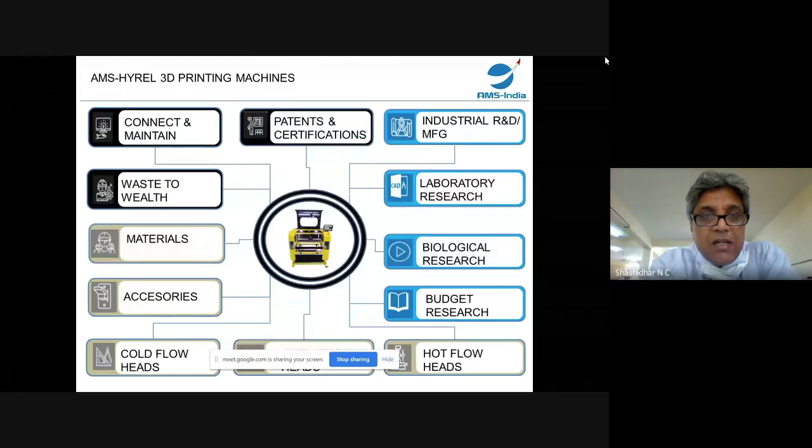I will talk about the accessories of the machine, which will give an insight on how versatile a machine can be. I will also give a little information on a topic called waste to wealth, which may be very useful for students and the community given the current times. I will also talk about materials which can be printed or used in additive manufacturing, and give information on the connectivity of this machine, which will really help for research purposes.

Our factory is in Peenya, about 2,500 square feet, and we make 4 machines. We classify our machines into 4 brands: industrial research machine, laboratory research, biological research, and budget research. There are 4 categories of machines that we make. I will go through each in more depth and tell you specifically what these machines are and why we have categorized them like that.

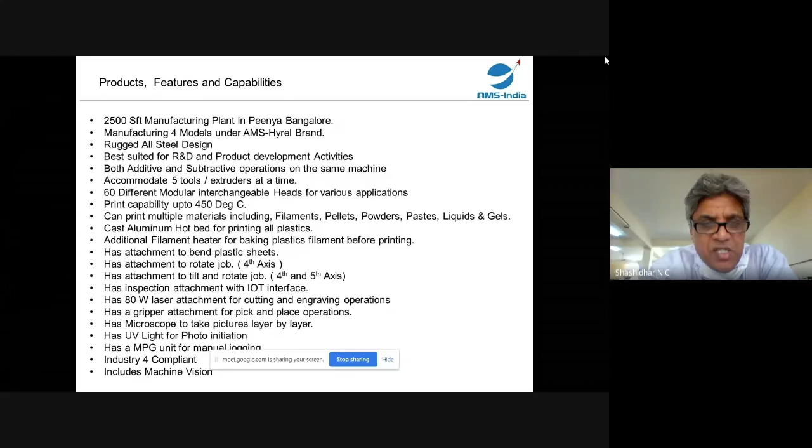But fundamentally, the gist of what our machines can do, as a snapshot, I am giving it to you in this slide. The machines are all steel. One of the most important things we have done is that our machine can be both subtractive and additive in nature, meaning you can do additive manufacturing and also subtractive operations like machining, or remove material and other things. It can accommodate 5 tools at a time, meaning 5 different materials can be processed. This is a feature with which we'll be able to mix and match different materials, thereby making composites, or it can be used for biological purposes for mixing different gels or liquids together.

The machine is flexible enough. What we have done is develop different modular heads which are interchangeable and can be used across any machine. Across the platforms, these modular heads are common. So one can have a head for civil engineering purposes, and tomorrow another head can be attached for the electronics department, and the day after tomorrow something else for mechanical. So a lot of people can use the machine at the same time, only the heads are going to be different.

A machine has the capability to print up to 450 degrees centigrade, which is the temperature to which our extruders can go. So anything that can melt within 450 degrees centigrade can be printed on our machine. Different types of materials including filaments, pellets, powders, pastes, gels, etc. can be printed. We have a hot aluminum bed on which we can print. Apart from that, there are many more accessories which I will show you in more detail in the coming slides.

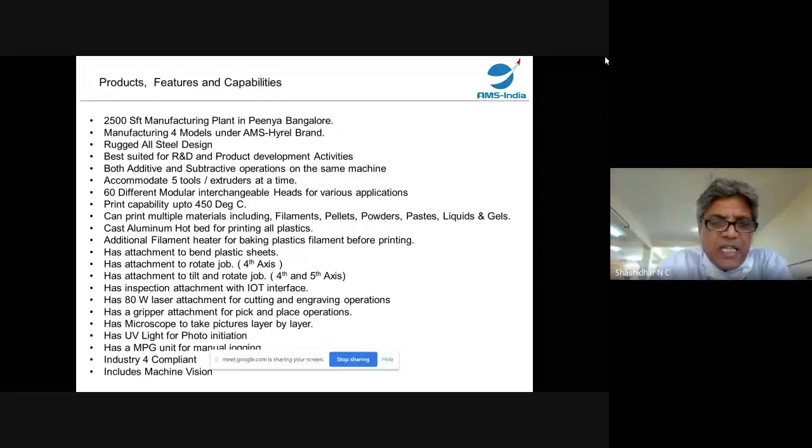Across the globe, we have supplied this to more than 35 countries. More than 650 machines have been supplied, including to NASA and many other institutions across the globe.

Quickly, I just want to go through one small topic from which we started this whole activity, something called Precious Plastics. A couple of years back, there was an organization called Precious Plastics from the Netherlands. They wanted to save plastic wastage and reuse it, recycle it, and create something by which people can use this wasted plastic and make something useful out of it. So we created a concept called waste to wealth.

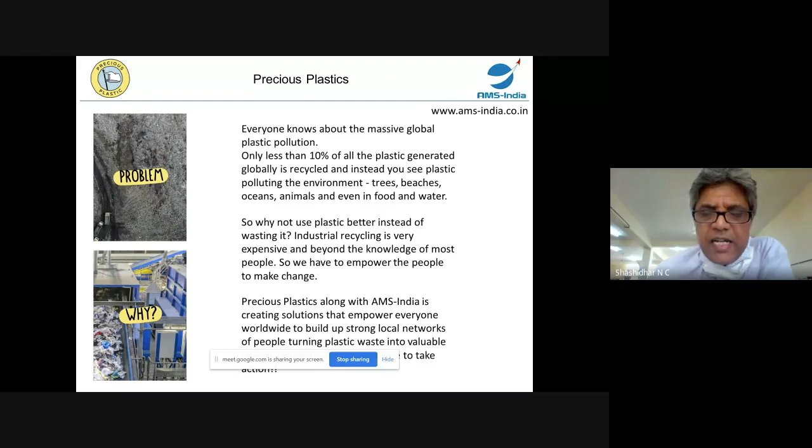Then we created machines under the same category of waste to wealth, given as kits, given as technology, at a very low cost for students, for people who want a job, who do not have jobs, who want to do something as a startup, who want to do some project of their own, who want to make some money. As a community, people are having these machines nowadays to utilize ways by which plastic can be processed.

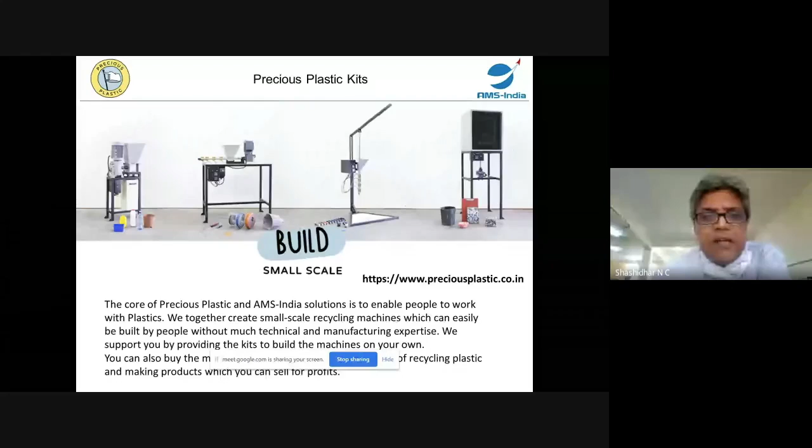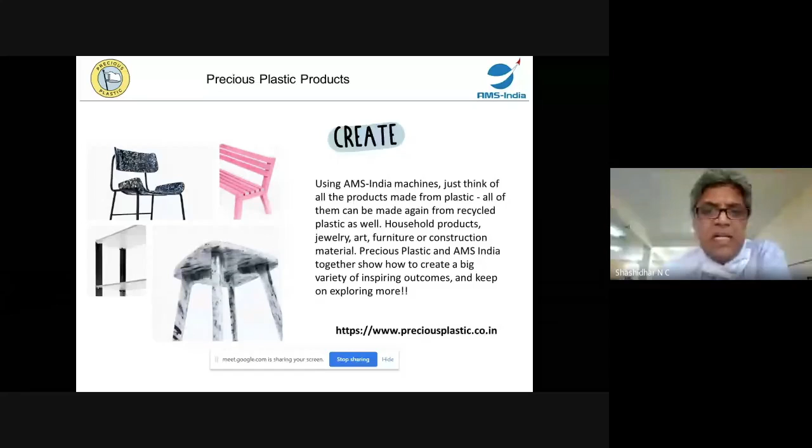And we also make higher types of machines which are semi-industrial in nature, wherein we can create different types of parts made in plastic. Basically, these are the machines that we are making.

The plastic shredding machine, where all the plastic waste can be converted into pellets, and these pellets can be put into an extruder by which we'll be able to make filaments, which can be printed. This is the whole storyline of converting from waste to wealth.

Initially, a person who is trying to look out for a job can just look at the plastic extrusion, plastic shredding machine, and put it in his own community, bakeries, houses, apartments, etc. Whatever plastics are being generated within the house itself can be shredded into pellets, and people are there to purchase those pellets and use them for a variety of purposes, where they pay money and take the waste.

So throwing those things, community-wise, we can convert it into pellets. And then we can use the same pellets. They can go for the next machine where they can make filaments of different categories, shapes and sizes, and then it can also be used for 3D printing and making parts.

This is the storyline. I would like to now give you details about the 3 individual machines that we are manufacturing, and give you a little more details on what the machine can do and what are the features on the machine, whereby we will be able to do a lot of operations which makes the machine very powerful.

This machine is called Hydra. We make machines under the brand name of AMS Hyrel 3D printing machine. Hyrel stands for high reliability. Call this machine Hydra 16A.

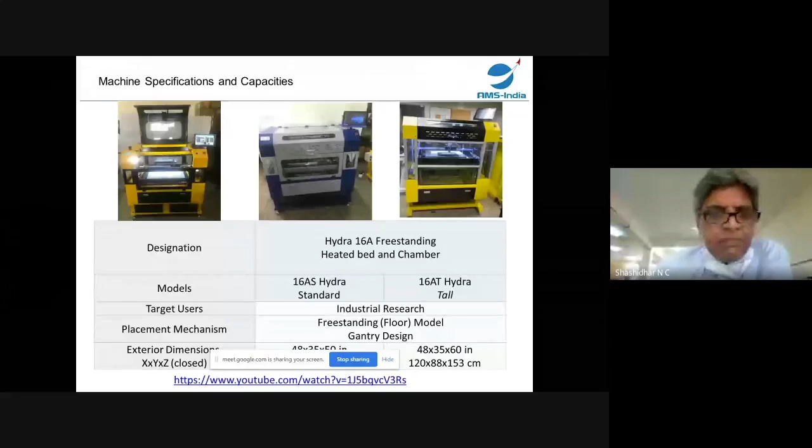The machine has the capability of printing up to 450 degrees centigrade, which means the bed itself can be taken to nearly 200 degrees centigrade. It has a baking unit where the filaments are first baked to remove the moisture. It can also be taken from 0 to 250 degrees centigrade on the baking oven and then used for printing. That is the feature of the machine.

The machine is pretty accurate by itself. It has a closed loop encoder feedback CNC controlled machine. So all the programming is done just like how we do for a CNC machine. We can program it using G codes itself. The machine is made so versatile that we can program it just like how we do any other programming.

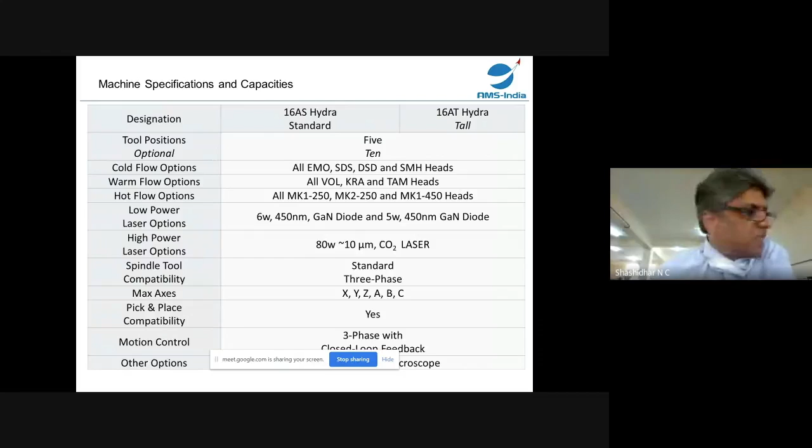It doesn't necessarily have to follow the conventional process of additive manufacturing by slicing itself. The machine has 5 different tool positions, and basically we have categorized all the extruders that we have into 3 categories: cold flow, warm flow, and hot flow.

In the cold flow extruders, we have material which can be extruded in cold condition, that means when it is cold. Examples like pastes - somebody wants to print or make something in cement, plaster of Paris, ceramics, or food grade material. All these are cold flow. If they have such material, they can print in cold flow extruders. And gels, epoxies, everything can be done on cold flow.

On the warm flow options, we can have a chamber which is heated and then the material is extruded through the warm flow. So materials like wax, PVA, PCL, which melt at very low temperature - for example, around 60 to 70 degrees these materials melt. So if you want to print using such material, you can use this extruder which will warm it up to 180 degrees centigrade, and then we will be able to print it out.

Hot flow options can go up to 450 degrees centigrade. Necessarily they are all in the form of filaments of plastics of three categories: low temperature plastics, which are general plastics like ABS and PLA, and engineering plastics, which are a little higher in temperature plastics.

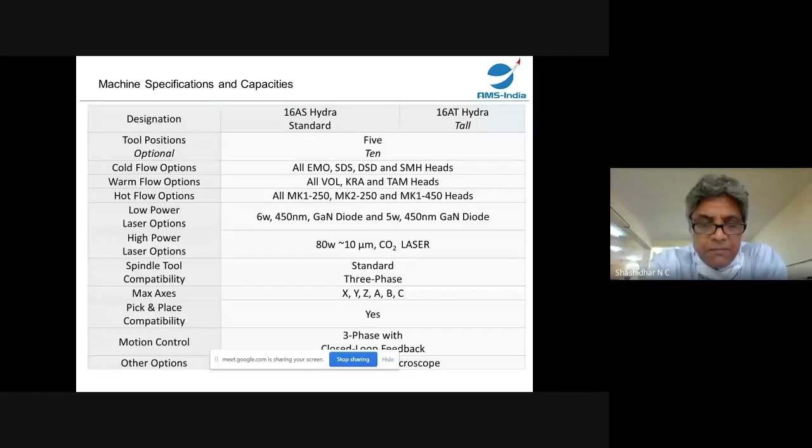We have a spindle tool compatibility, so you can have a spindle tool which rotates at nearly 18,000 RPM, and this spindle tool also gets attached on the same machine. The machine has got up to 6 axes which can be controlled, and it's also got a microscope attachment.

The next machine I want to introduce is the laboratory research machine, which is a smaller machine of 200 by 200 in size, which is only for additive manufacturing purposes. It is not a gantry design, it is a knee type of design. We call it a system printing.

Different materials that we print on the machine include ABS, PLA, plastics, etc. We have categorized and shown you what can be done on the hot flow extruders, the cold flow extruders, and the warm flow extruders. This includes precious metal clay, which many jewelry manufacturers use for printing. You can print porcelain, waxes, epoxies, and RTV silicone, including room temperature vulcanizing silicone, or photopolymerization silicone, printed on the cold flow extruder.

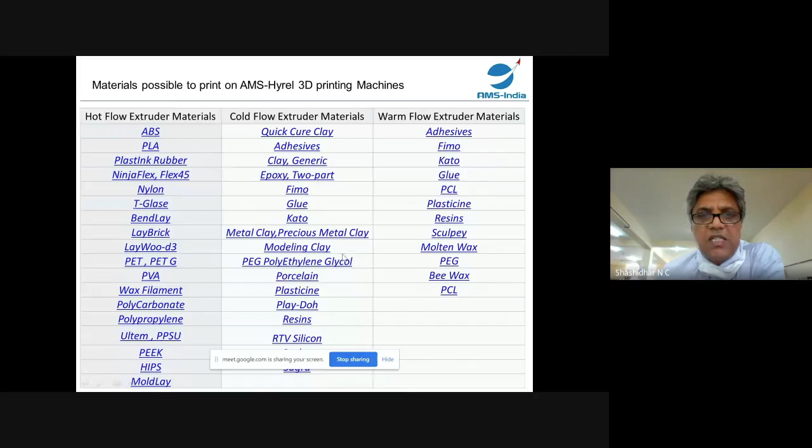In the hot flow extruders, we can go up to PEEK and ULTEM, and other very high temperature plastics. Warm flow extruders consist of molten wax, PEG, and bee wax, etc., printed on the warm flow extruders. Some of the different materials we have printed include ceramics and other things.

Most important here are the different extruders. I want to categorize and show you the difference between these extruders and how we are able to print using them. First, the hot flow print heads. These are basically 1.75mm filament print heads, but can go up to 450 degrees centigrade. This is one extruder, and you can see there is a controller on the extruder itself, which makes this extruder very unique.

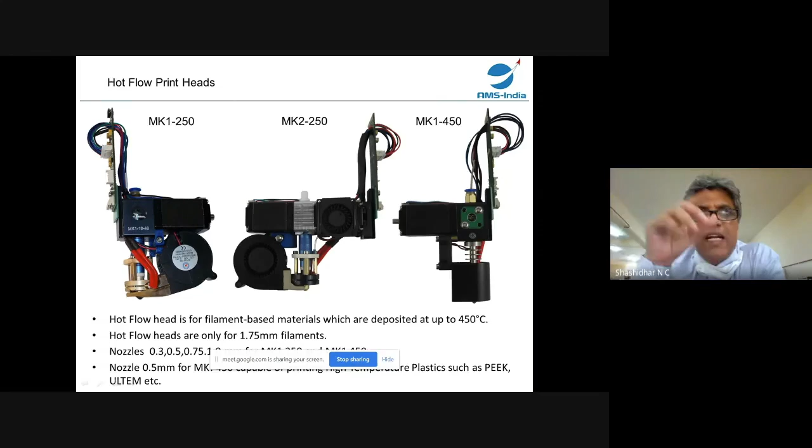Since the control is on the extruder, I can interchange it, take it and put it on any machine, and it will still work. There is a controller which talks to the CNC and ensures this particular extruder works only with this particular machine. This is the hot flow head, and we have up to MK1-450. MK1 stands for one motor, MK2 stands for two motors. Some filaments are very soft in nature and need two motors, otherwise the filament will cut. So we have MK2 and MK1 filament extruders, with MK1 only for single filament extruders.

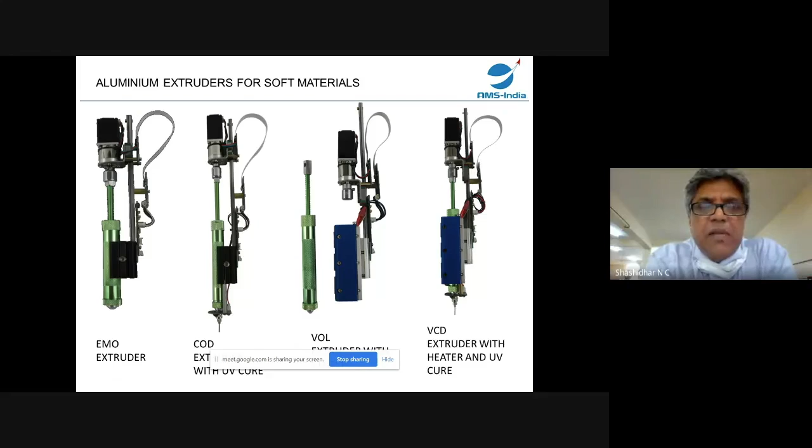Then in the cold flow, we have three different extruders made up of three different materials. One is the aluminum extruder, for materials which are soft in nature, like pastes, etc., which can be printed with these extruders. It is called an EMO extruder. This extruder basically has an attachment at the bottom where, if needed, we can have UV curing also.

Up to 395 nanometers, we can have UV curing. So if you put silicones and want them cured instantly, you can have this attachment wherein it will be curing immediately. We also have a heating attachment on the machine, on this extruder. So the same extruder port will be heated during printing, and it's also got heating with UV cure.

You can see this is like a CNC axis. There is a ball screw into which the screw and nut is designed so that the motor rotates it and squeezes it along with the XYZ motion of the machine. Thereby the motion is controlled with the material outflow, and that is how printing is done in this type of extruder.

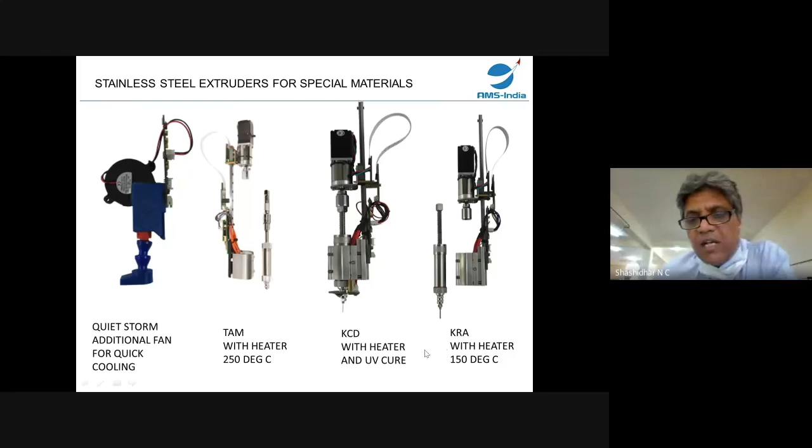This type of extruder uses the same technology, but here the extruder body is made up of stainless steel. Especially when you have materials which are corrosive or reactive in nature, we use a stainless steel extruder instead of something else. The metal is hard, especially for ceramic pastes, which are pretty hard in nature, so we have an extra torque motor on this extruder. Again it has features for cooling it very fast, like a Storm cooler, and it's also got UV cure, and can be heated up to 150 degrees centigrade. This is the stainless steel extruder.

The third type is the same attachment on our extruder that goes with a plastic syringe, similar to an injection syringe which we use at different sizes. The same injection syringe can be used for printing. This is where it makes a difference. The extruder goes onto the same machine, but most important is this disposable item. If you have liquids, gels or paste which can be used one time, and you have to throw it away or mix and print, in such cases we use this type of extruder, where it is a use-and-throw type system. So plastic syringes are used, and we can print with this also.

And again this is CNC controlled. It is an axis by itself, with its own motor, and that is how we are able to print. You also have a dual syringe system where you have two syringes and then a mixing head.

I'd like to highlight some of the accessories which go on the machine apart from the extruders, and these accessories really make the machine very friendly for research purposes. Like I told you, there's a diode laser. This diode also goes onto the same yoke on the machine. The machine yoke has 5 heads, 5 tool heads. As soon as you put a particular extruder on the head, it immediately identifies what it is, and the operations related to it can be performed.

You can see that it's also got an inspection microscope on the machine, and this is again controlled by G codes. Whatever I'm showing you, everything is programmed and controlled by G codes. So when programming, suppose you want to make a research paper, somebody wants to print layer by layer and take images of every layer.

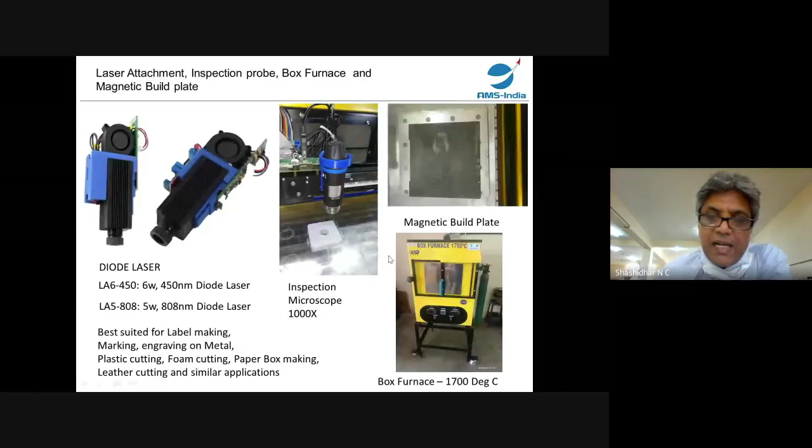The other attachments that go with the machine include a powder feeder attachment, so we can actually print powders - you can print sand and iron powder. When you print sand and iron powder in different layers, the iron powder is what actually takes the shape of the end part that we need.

Then we have an infill material kept on top of the crucible, and we can put it in our furnace, and the infill will melt at a lower temperature than the bare iron powder, then it percolates down, diffuses, and makes a solid part. This is a patented design of ours, called the micro diffusion process. The powder feeder attachment is capable of doing micro diffusion, making steel parts with that.

People can do a lot of research across the world. People are doing something with this attachment, wherein they are trying out and developing different alloys of steel and combinations of steel and many other materials.

We also have an attachment wherein we can print labels and stickers on the machine.

On the same attachment, we have a piezoelectric extruder also mounted on a similar head, wherein you'll be able to do conductive ink printing. An electronics student who wants to make a circuit diagram or print a circuit and check how exactly it works can put conductive ink into it and print the circuit. After it is printed, they can test it out, and if it is okay, they can go in for mass production. But for R&D purposes, this is a very useful attachment.

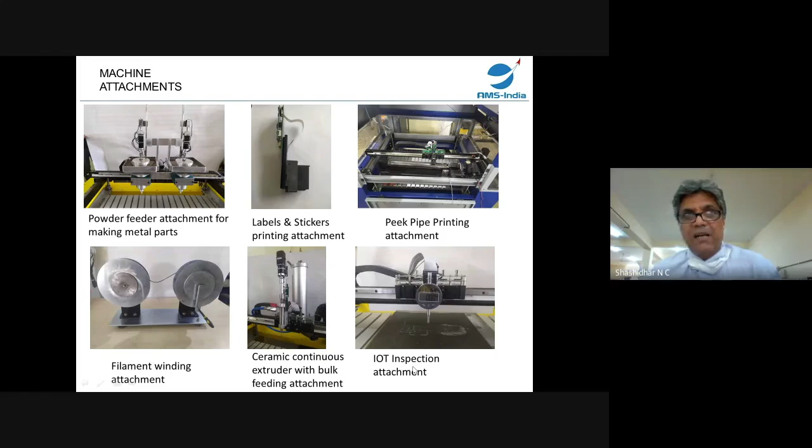It is IoT dependent, so it's not only taking the data, it is connected to a CAN bus. From the CAN bus, the RS-232 data is converted and saved into a remote database for measurement purposes or for analysis.

We have a gripper attachment. So if you want to pick and place, or if you want some attachment for research, you want to test, you want to pick up the part after printing and put it aside, or you want to use an inspection equipment like laser inspection equipment to segregate the part as good or bad, the gripper attachment is very useful.

The filament baking attachment you can see here basically bakes the filament, taking it to a temperature of 200-250 degrees centigrade, because in conditions in India, where moisture is actually an enemy for plastics, this helps remove the moisture in the filament before printing, thereby improving the quality of printing.

There's a bending attachment on the machine by which you'll be able to bend plastic material by heating the bottom of the plastic and using it for bending. You can also see over here a turning and milling attachment.

Especially for students and colleges, we have a pen attachment. If they have to teach students G codes and M codes, they can write the G code or M code and use a pen to actually draw on a piece of paper, and thereby see what the G code does. Suppose G01, X so much, Y so much, from here to here, they can make it move in a particular shape or pattern, and then see that the code is good. That's how they learn G codes and M codes.

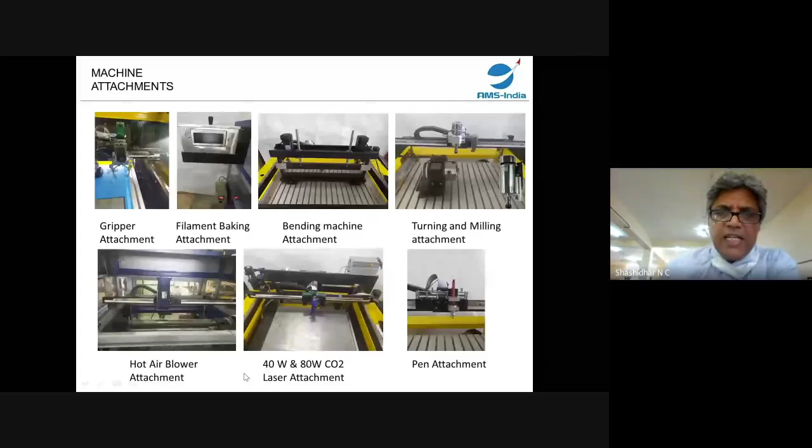The next thing is connectivity and maintenance. The machine has excellent connectivity. We have an OPC server attached on the machine, so you can get data out. Suppose somebody wants to do research on artificial intelligence, or machine learning or deep learning exercises, they want data. This OPC throws out the print data itself.

It is programmed every second, so this data keeps coming out of the machine continuously throughout the time of print, whereby you can do data analysis. Even computer science students are doing it. We are working with NIT Calicut for more work in this area. They're using this facility for machine learning and also for preventive maintenance purposes.

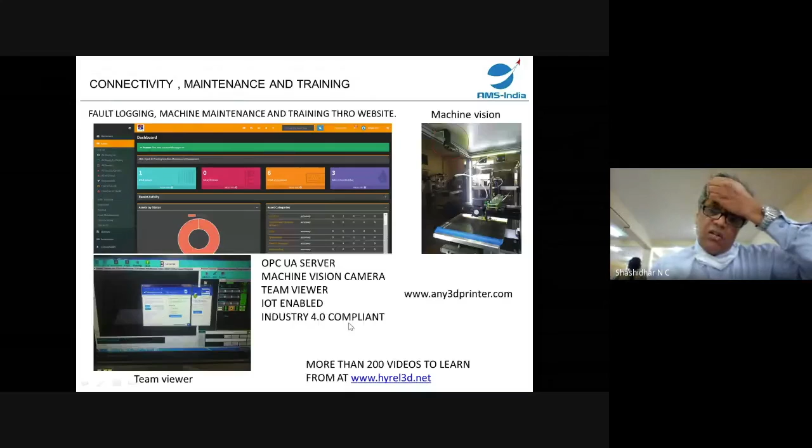We have machine vision also, whereby remotely you can see what is being printed and control what is being printed. We have a team viewer on the machine, and it is IoT compliant, it is Industry 4.0 compliant, and we will be able to get complete control of the machine using team viewer. This is about the industrial research machines I just mentioned.

Everything to do with the two machines, Hydra and the System 30, is what I have covered till now. From here onwards, I'll talk a little about the biological research machine that we have.

This is a bioprinting machine, and it is very much useful for bioprinting. It has a very small printing area, 100 by 100 by 100 mm, but there is a very clear benefit of this machine because it's very accurate. Everything is direct drive, CNC controlled, and it is a very precise machine which can print in wells with special heads made for this purpose. I'll go through it in detail.

The machine also has an attachment wherein we make a biosafety cabinet, because of biological printing. We can put it in this biosafety cabinet and then use it for printing remotely. That means you don't have to touch the machine. You can get whole control from outside, and you'll be able to control the machine from outside the biosafety cabinet itself. Because I know this is used for a lot of biological research purposes, this feature is given.

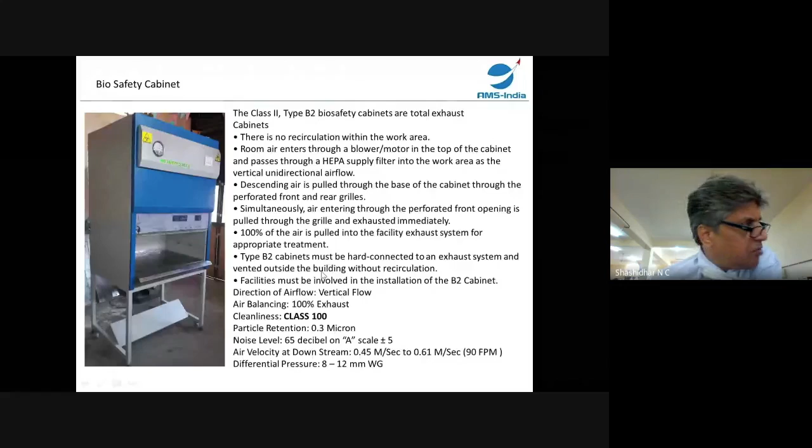This machine is an extrusion based machine, similar to injection syringes. Five different syringes can be put together on the machine and printed to form different shapes. This is predominantly used for tissue engineering. This machine or facility is used for tissue engineering, and it has a feature for printing different types of scaffolds, rafts, and dams which are required. I will show you what it does in the next slides.

I'd like to bring your attention to a site called hyrel3d.net, a wiki page where papers are published based on our machine. When we supply a machine, whenever a student or researcher publishes a paper, we take the link and put it here. You can go through this link and see the different types of papers published in different areas, which will really help R&D or research purposes. You can see on our website there are more than 300-400 papers.

People interested can please go through this website. I have listed some of the bio applications done on our machine using biomaterials. The details of each one are on our website, hyrel3d.net, where you can download the paper and go through it in detail. I don't want to detail each one here because it takes too much time. I think Abhishek will give you more detail on bioprinting.

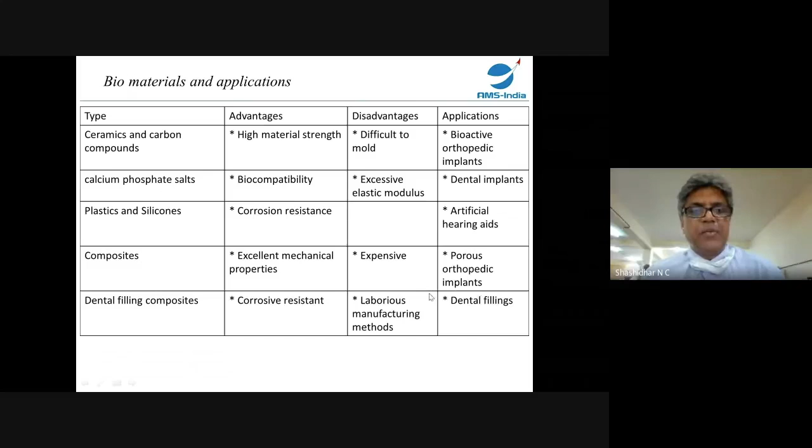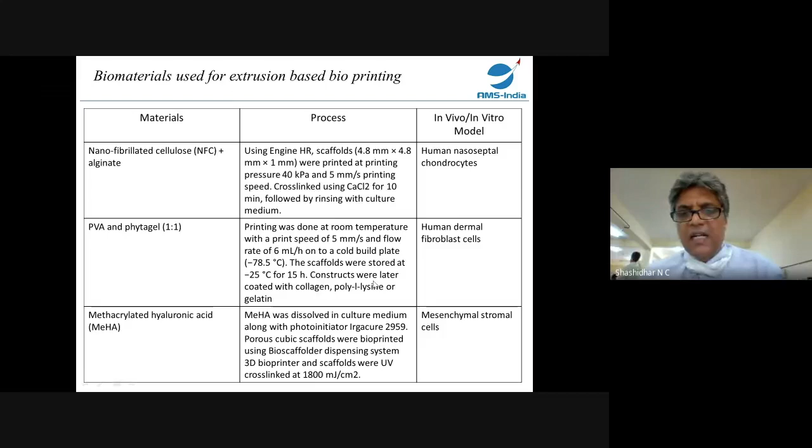Here they are printed with ceramics, calcium phosphate, salts, composites, dental filling - these are all different types of biomaterials, and how this is done on our machine printing is depicted on the website and in the published papers. Similarly, these are all different biomaterials used in the same printing, including nanofibrillated NFCs and PVAs. Many of these things have been listed in detail on our website. You can go through all this bioprinting, how it is done.

Basically, what features we are given on the machine for doing such bio applications, I will explain to you. First, the machine is called Engine HR, the high resolution machine.

It works on the SDS extruder, specially made for this purpose. The SDS extruders have got an external axis, one more axis, and then it works with different cylinders. The SDS was compatible in industrial research machines up to 120cc cylinders. Here only 10cc cylinders are adapted to this.

Different biomaterials are there. It also comes with a 24 well plate, electronic wafer plate, into which we are able to print scaffolds if required.

And then we have, you can see the software, whatever you're seeing on the screen is basically a screenshot of what is there. You can print the raft and the scaffold. You can create these scaffolds for printing in bio inks. And that is what we have shown.

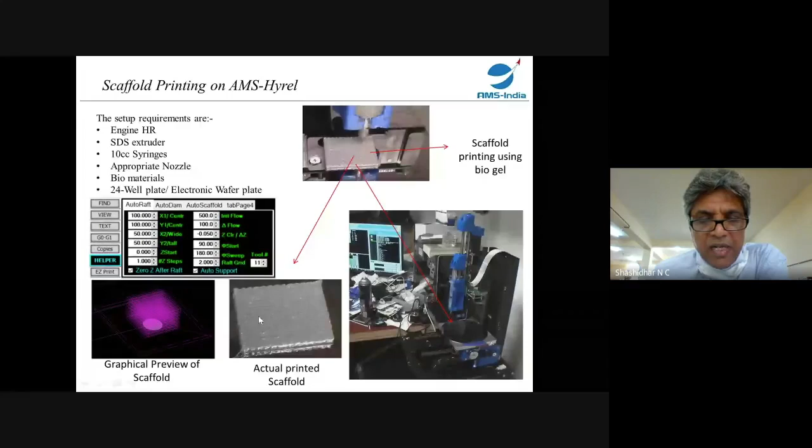This is a graphical view of the whole scaffold, and this is how it is printed. After it has been printed, the image is over.

And the Repetrel software that we have has got this scaffold printing in a well. You can actually have it as in 10 microns, up to 10 microns. You can do between layers and between things. You can program it in G code, however it is required.

You can have zebra prints. You can have dams, scaffolds, pockets, everything printed on the same machine. These are all the tools which are given basically for bioprinting, where we can print different types of bio inks.

And not only that, our machine has got a refrigerated extruder. The extruder is refrigerated, so it can go sub-ambient temperature. Whatever material you want to print, you can take it to much less than 0 degrees, and you also have a bed which can go up to 0 degrees.

Sub-ambient temperatures also it can go. Not only heating, it can also be cooled down for biological printing purposes. RSD stands for refrigerator syringe device.

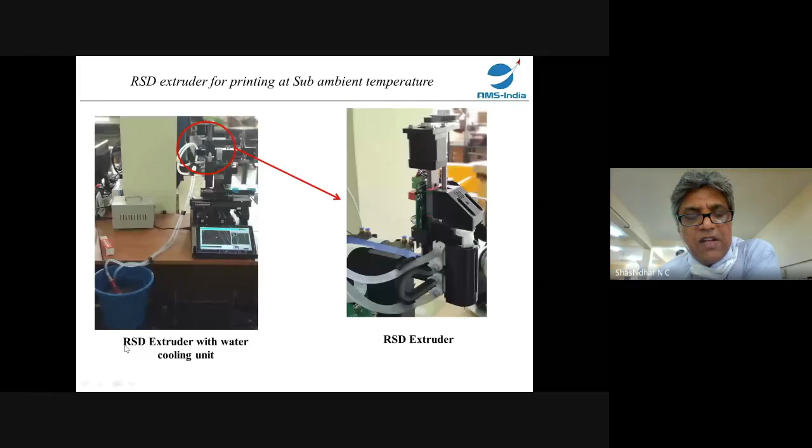And you can see, again, the same extruders, we also have ultraviolet rays. Here we have ultraviolet not for curing purposes, but also for killing. So you can go up to minor ultraviolet C, we can program on this. So after it has been printed, you can actually use it for killing different types of tissues if required.

Minus 10 to plus 35 is what we can take the extruder and the bed. And there's a clench valve, so you want to mix and match different liquids together and do the experiments in metered quantity. You want 10 ml of one liquid and 3 ml of another, you can program it and exactly mix and match and check it out. What is the reaction that is going to happen using this particular feature.

And you can also mix and print, not only mix and test, it can be mixed and printed out also. And I know that this particular mixer that we have got has been purchased by many R&D institutions for tissue engineering purposes.

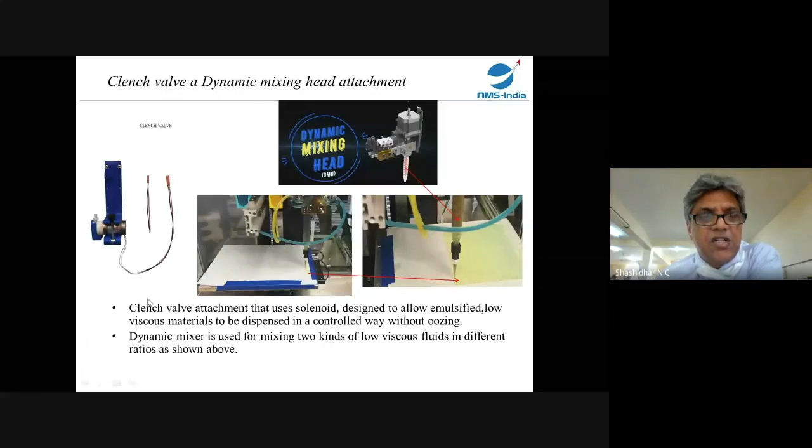We also have tied up here as channel training partner for Siemens. So if people want, we train people on design for additive manufacturing, DFAM. Siemens has a software in NX, a module called DFAM.

We give training on using the Siemens package, and they get a certificate also from Siemens. This certificate is given to the individual who goes through the training and passes it on the Siemens website after our training is given. So we are channel partner with Siemens.

We also work closely with Suprajiv as training partners. They depute their engineers for training. They have been trained by us, so they act as faculty. They will organize the training, and Siemens will give the certification also.

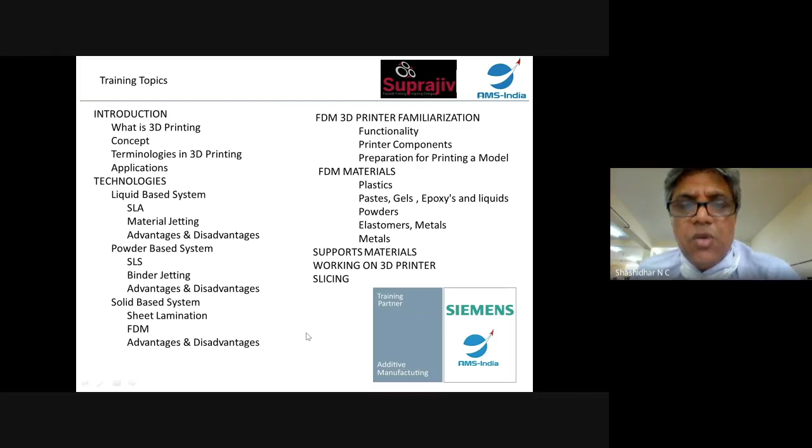We are CE certified, we have a patent on the machine, and we are also ISO certified. This is just an introduction about the machine that we have, with which we'll be able to do all these operations that I just mentioned.

I have nothing more to present, but I think maybe Abhishek can take over from here and continue the presentation. Is there any questions you have on this? I'll be very happy to answer it right now.

Hello. Hello, yeah. Is there any questions that you have? I can answer it right now, or if you want at the end also, or if you want Abhishek to continue, he will continue from there.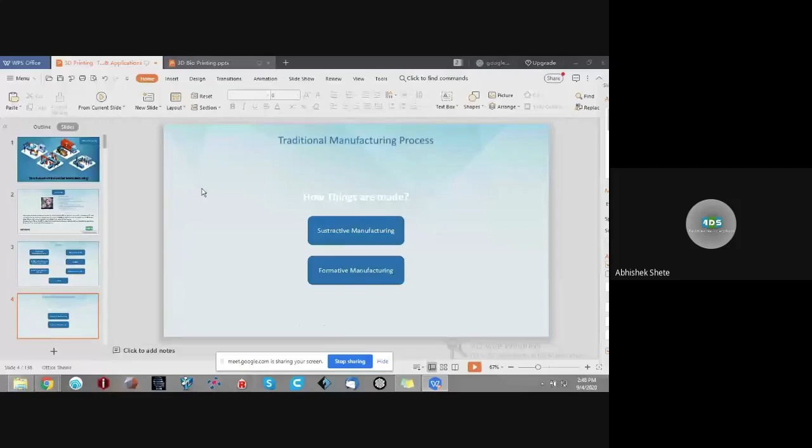Shashi sir has given us an input about the printer and its different features, how we can make a different part. So I will just give you insight on the applications the 3D printer is capable of. Before that, we'll give you a brief about the traditional manufacturing process. Can you able to see my screen?

Yes, yes, yes. Okay, so basically right now we are into Industry 4.0, and we are trying to make the manufacturing shop floors more and more advanced. We are trying to connect it with digital manufacturing. We are making the machines more smarter with IoT, big data, AI, and machine learning codes. So if we see right now how we traditionally manufacture things, we generally have two manufacturing trends: one is subtractive manufacturing, and another one is formative manufacturing technology.

In subtractive manufacturing, we go on subtracting material from a desired block, or we melt the material and add it in a core or cavity of a sand cast. In formative manufacturing technology, we first design the mold, manufacture the molds, and then force the material to melt and take the shape reflected on the cavity of the mold. Then we have sheet metal bending tools where we try to bend the sheet metal to take the desired shape. So these are traditional manufacturing tools which need a lot of sets of different tools, like for machining we need different types of CNC machines with turning, boring, milling.

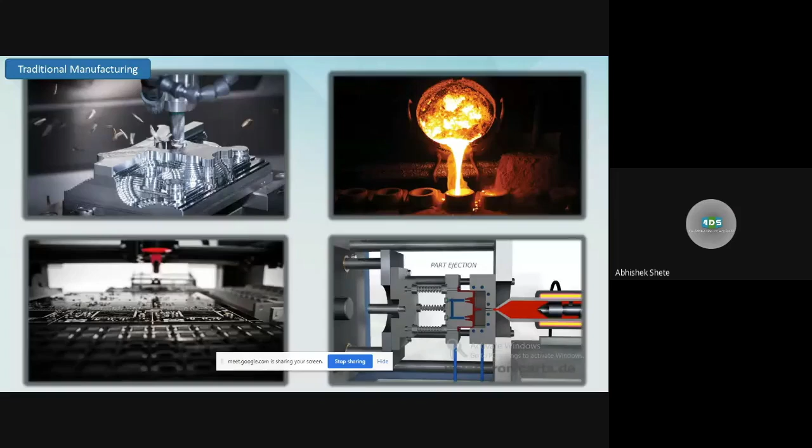Need a lot of different tools. If we see the current manufacturing process, right from designing to getting the final parts manufactured, there are a lot of stages. First is the conceptual designs. Once you have a design done in your product development cycle, you go on testing those designs. You make the prototypes traditionally, and you may need to make the prototype with tooling for the prototyping.

Once the prototype is validated with fitment testing, drop testing, and functional testing, you go for the machining, or if you're going for batch manufacturing, you choose the casting method, or you go for injection molding. For that, we need to define the production process, we need to define the tooling, we need to manufacture the fixture fabrication. If we are going with injection molding, we need to make different kinds of molds, and if we are going with machining, we have to program it with CAM programming.

Then we have to manage the logistics, supply chains, the raw material procurement. So there are lots of processes and stages involved in traditional manufacturing, and it takes a very long time when we design the parts.

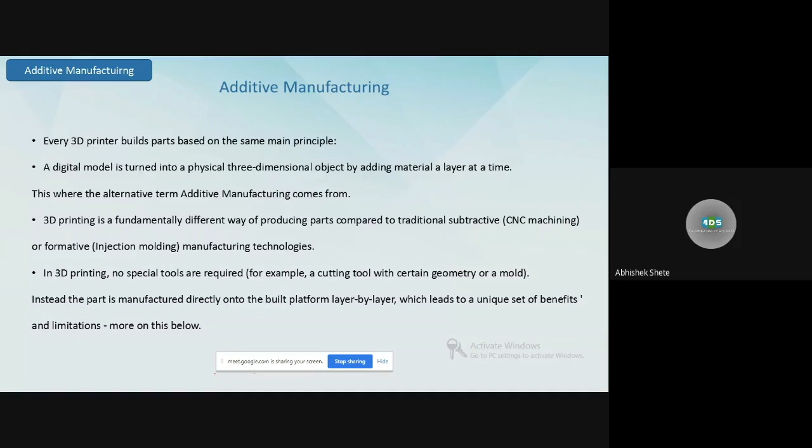3D printing is nothing but a tool-less manufacturing technology. Once you have a CAD design, you can directly go to replicate those parts with the 3D printer and get parts physically made.

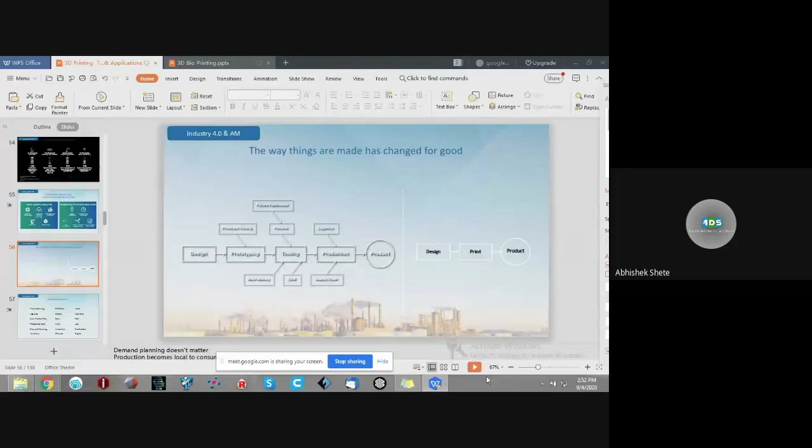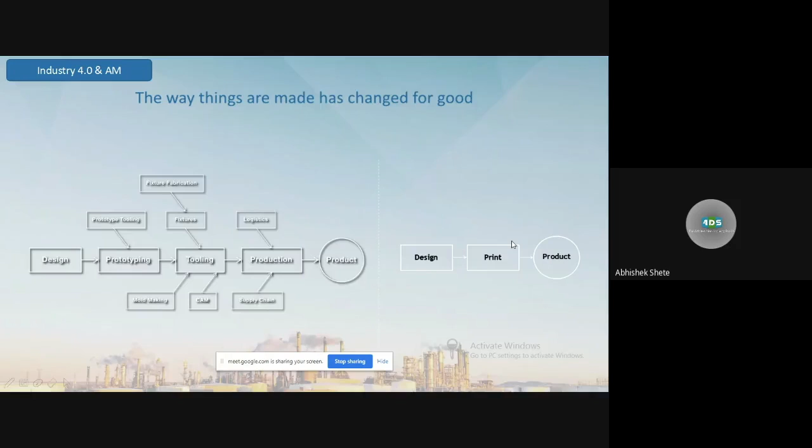If we see really, 3D printing is a one-go process where we can bridge the gap between actual designing the part to the final part. Because 3D printing is a tool-less manufacturing technology, we don't need any specific set of machineries, any specific production method, or any specific tooling development technology. If you have a CAD design, you can directly print it with a 3D printer. The 3D printer is nothing but a tool-less manufacturing technology where a nozzle deposits a particular material on a stationary platform layer by layer to replicate a desired profile which you have designed.

So where is the area of interest, where is the scope of this 3D printing application? Whatever you can think, you can design, you can directly replicate into an actual physical product. There is a lot of potential in each industry, especially military and defense, aerospace, automobile, mobility, transportation, and very much potential in healthcare and the biomedical field, which can accelerate research and development in terms of tissue engineering, electronics, and consumer goods. We'll see these applications one by one.

In military and defense, a lot of gadgets are made, defense drones, surveillance drones, guns, shells, and defense instruments are made. If you go with traditional manufacturing, it takes a lot of time, because first you need to make a prototype, validate it, then go for production, machine it, select the material, and test it again. Different kinds of processes are involved in this technology.

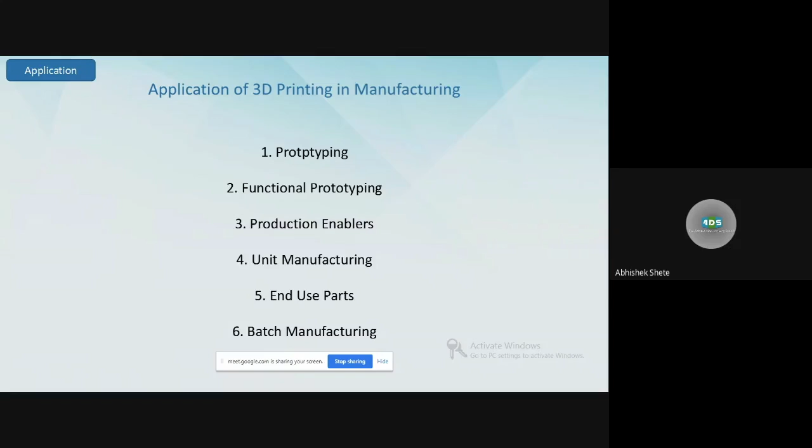Once your prototype is approved, you can do the actual functional prototyping. You can make conceptual models to accelerate your product development cycle, for forms and fitment testing, for functional prototyping. You can prototype injection molded parts, high detail models. The advantage with additive manufacturing is it can iterate faster from design to prototype. You can get your ideas reflected very easily on a physical object, and it will be very helpful for you to imagine it in actual format.

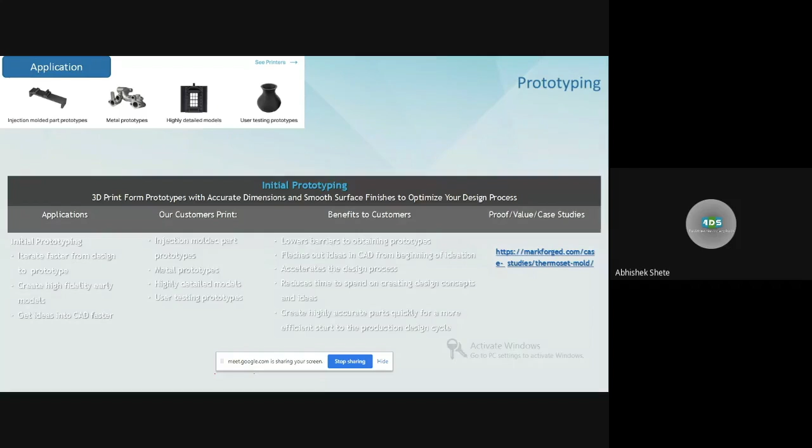So it will reduce the time spent on creating design concepts and ideas, and it will give you highly accurate parts quickly for more efficient start of product design cycles. Then you can test those parts with functional testing, and once approved, you can move for production. So this is what 3D printing was limited to earlier, for prototyping.

But now, 3D printing can actually be implemented in your actual production cycle or production process. If you look at different types of production lines, assembly lines, QC lines, there are a lot of parts which we use.

We use a lot of jigs and fixtures in each production cycle. In each production station, we need to hold the particular workpiece on which we are working to turn it into a final product, and we need to do a lot of operations on that. So with each operation station, we need jigs, fixtures, and grippers to hold the part, pick it up, place it on another part, or different types of end of arm tooling to perform different operations. We need different types of forming tools, like presses, dies, and punches, to form the shape of a metal sheet.

Then we need a lot of go-no-go gauges, receiver gauges, profile check gauges, and limit gauges to validate the parts on a production line and qualify them for the next production cycle. Then, if you are using a coordinate measuring machine, CMM, a lot of inspection fixtures can be directly 3D printed. We'll see this in detail.

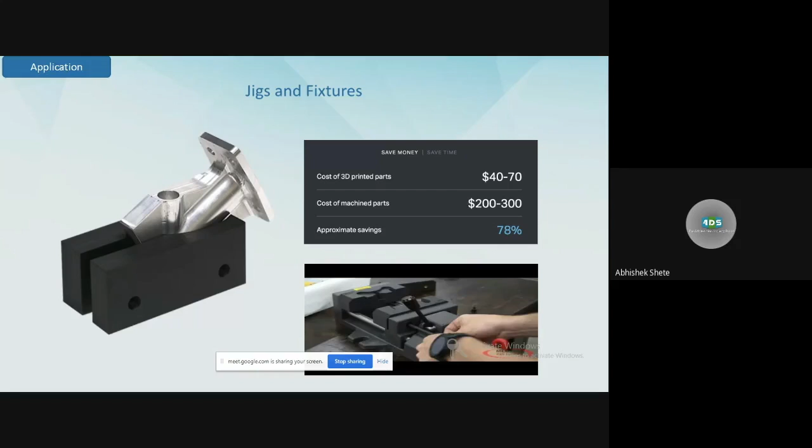You can directly 3D print this part with high engineering grade thermoplastic materials, where you can reinforce it with continuous carbon fiber to get around 800 MPa of tensile strength, which is equivalent to T6 grade aluminum, which is 6061 aluminum. So you can print a part with strength greater than a metal part, but very lightweight because of the continuous carbon fiber reinforcement, so your part will sustain on your production line, giving around 75 to 80% cost and time savings.

This is again a company called Wärtsilä, a US based company. They have printed this piston lifting tool with continuous fiber reinforcement. This tool is used to lift a piston which weighs around 900 kg. This black color part is 3D printed.

If you look at the industry, earlier this part was a machined part. The issue with the machined part was that it was very expensive. Then second, when metal comes in contact with a metal surface, there is friction, and it was giving some defects on the outer periphery of the actual piston.

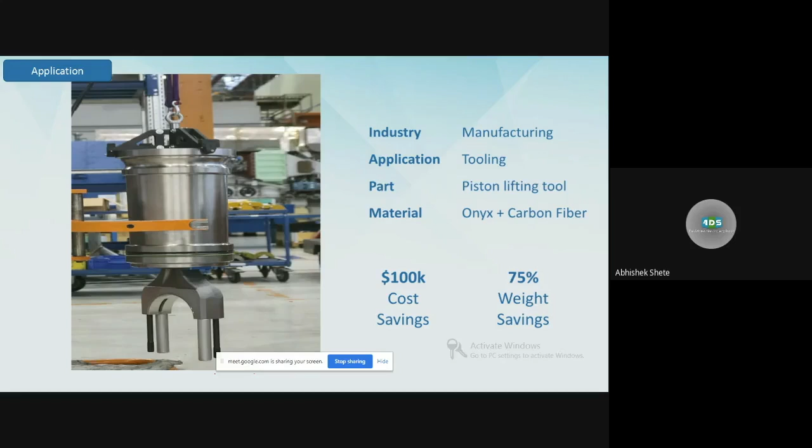So they might need to reject those pistons. When they printed it in a nylon material with continuous fiber reinforcement, this part performs the same function. It's a very high duty, high strength part, but very lightweight, and it can lift the 900 kg piston from one workstation and place it to another. There is a huge saving in terms of cost, around $100K US, and around 75% weight reduction compared to the earlier machined part.

So 3D printing has its own set of benefits. If you see, these are the assembly jigs for an electronic manufacturing company.

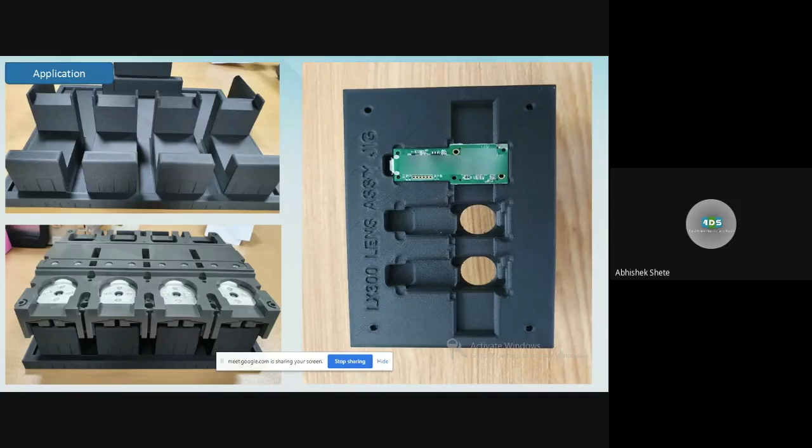If you see the PCB manufacturer, a lot of routing of the conductive ink needs to be done. There are multi-layer PCBs with dielectric materials, and these all need to be reflected on a PCB across different working stations. When these operations are going on, you need something sturdy which can hold the PCB with zero deviation. If you use a metal fixture, there is a chance it can harm the connections or the PCBs, so you can use jigs printed in high strength polymers. For testing, there are test fixtures, brackets, jigs, and custom work holdings you can directly 3D print. So these are applications of end-of-arm tooling in automation.

Right now we are into Industry 4.0, and almost all of our manufacturing lines are automated. They are with robotics and automation, and we use a lot of PLCs, robots, and cobots.

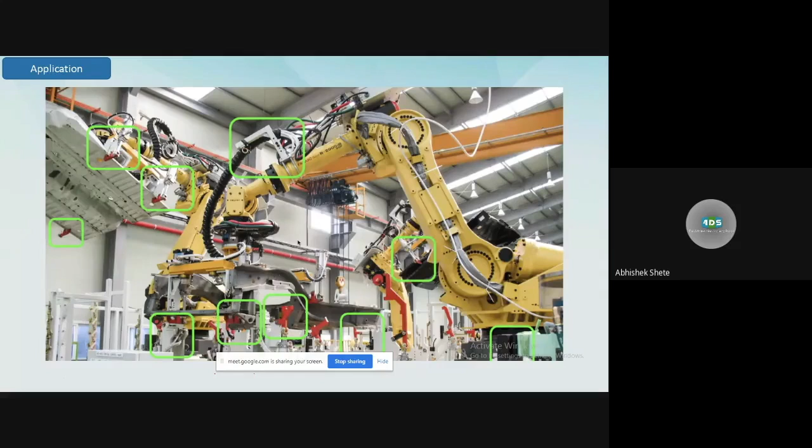This is a case study where we printed several parts on a robotic arm which are 3D printed. The first one is the end arm, used to pick and place the part from one station to another. Then there is the tooling end, which performs different types of operations. And there are many other parts which we can directly 3D print. The motto behind 3D printing these parts is huge savings in terms of cost and time, and second is design freedom.

As 3D printing is a toolless manufacturing technology, we can create as complex a part as we can, because traditional manufacturing has its own sets of limitations. When designing a part, we need to consider the manufacturing limits of each process, like injection molding or machining. But 3D printing is free from such limitations - the only constraint is that wall thickness should be greater than 0.5mm. Otherwise, any aerodynamic shape, any curve, any complex geometry can directly be reflected with a 3D printer.

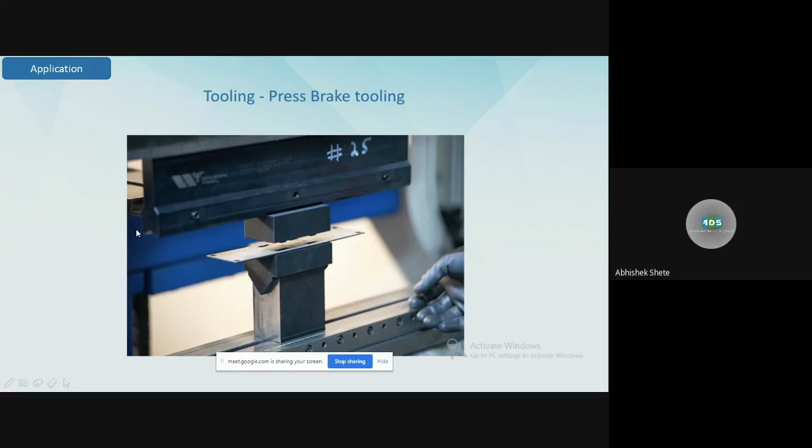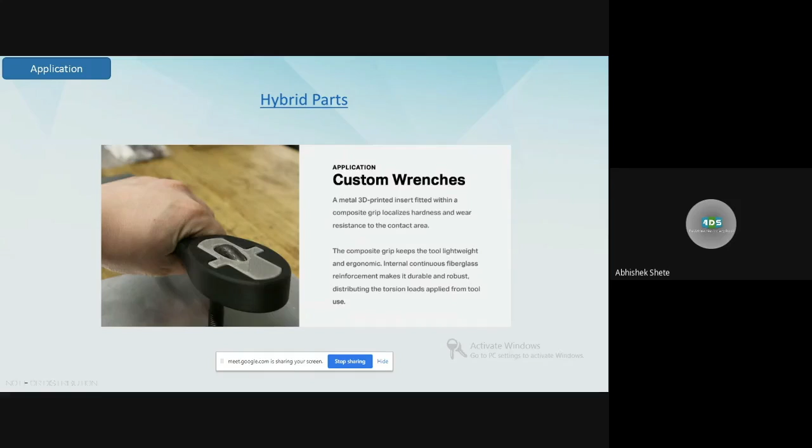This particular tool is used to put marks on this sheet metal component. Likewise, you can use 3D printed components as a forming tool to bend sheet metal, or as a master pattern for thermoforming, where you reflect a shape onto a plastic sheet. You can also create hybrid parts using 3D printing, combining metal 3D printing with plastic 3D printing to save huge on cost, so you can have your own custom tooling with 3D printing.

This is one example where we created a hybrid part. Whenever you need a very high amount of hardness and wear resistance, those parts you can 3D print, or machine with machining or metal 3D printing.

And for the rest of the body, where you need lightweight and a bigger part where energy absorption is higher, you can create that with high strength polymer 3D printing.

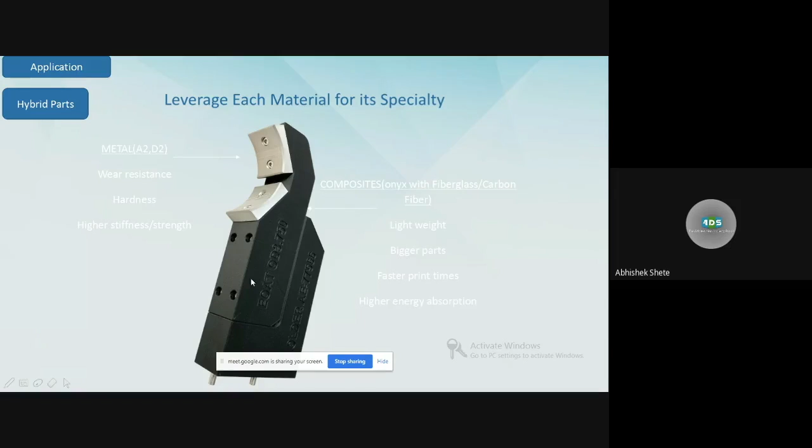Whenever you need to pick up parts that require higher wear resistance and hardness, you can use these metal caps, bolted fixedly. Where you need a soft jaw that should not harm the outer profile of fine metal finishes, you can use soft material like polymer or composites.

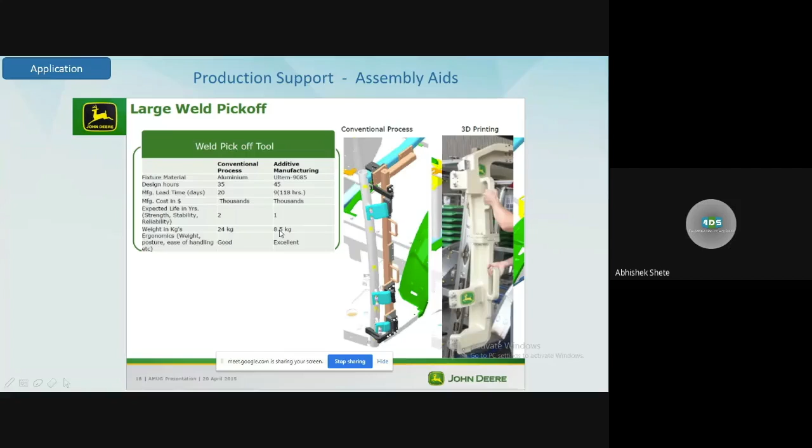This is a pick-off tool at John Deere. Earlier they used a part weighing 20 to 24 kg, but it was very difficult for repetitive operation, because the operator had to lift the tool from one place to remove the weld and place it in another cycle, lifting 24 kg every 5 minutes was hard. So we directly 3D printed it with a polymer material that reflects the same functionality, but the weight is drastically reduced, to around 8.8 kg.

In terms of tooling development also, you can use 3D printing, like printing thermoset molds, press brake tooling for forming tools, thermoforms, master patterns for sand casting, blow molds, and you can directly 3D print injection molds in metal 3D printing as well.

I'll just cover these case studies briefly, because we have less time and still need to see the bioprinting as well.

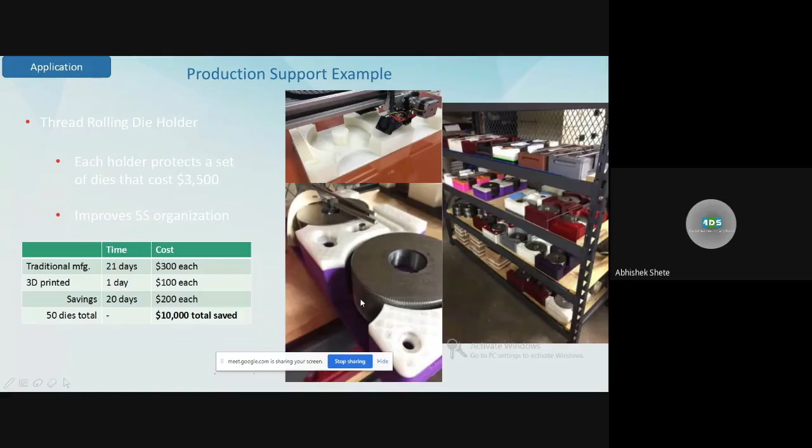These are some industrial examples on the manufacturing shop floor: thread rolling die holders to preserve external threads with very high precision dimensions and very sharp edges. You can also 3D print assembly aids, like shadow boards, which align parts and reduce assembly time for a particular assembly.

This is one example with a CMM. Generally, CMM machines are highly expensive and high efficiency machines. On an inspection line, when inspecting a part with the CMM, we spend almost 10 to 15 minutes setting up with V-blocks to hold that particular part. So if we spend around 10 to 12 minutes on tool setup, in 1 hour we can only inspect around 3 to 4 parts, which decreases the efficiency or output of that CMM machine.

So what we can do with 3D printing is generally take the outer profile of the part and 3D print that outer profile using Boolean operations in the CAD.

We can create a fixture to hold that particular part, and we can 3D print it within a very short span of time, and we can have that as a holding fixture on a CMM which can hold that part. So your earlier 10 to 12 minutes spent on setting up the V blocks and all can be reduced to around 30 seconds. If your 12 minutes is getting reduced to 30 seconds, you can imagine to what extent your productivity or efficiency of the machine will increase.

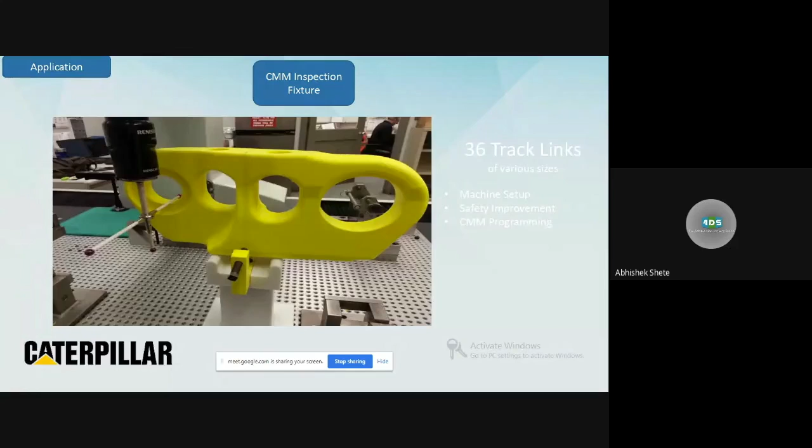If earlier you used to get 5 parts inspected per hour, now you can get much more. This will increase your efficiency to a very great extent, and it will save huge costs. That is a very good application in terms of casting.

If you see, we have investment casting, sand casting, and vacuum casting. In sand casting, generally we use a wooden material, so we need highly skilled manpower to turn out the draft angles, to turn out the actual CAD on a wooden pattern, and it is a time consuming process. To get one wooden pattern manufactured, you may need around a week of time, and then you need to do a lot of post processing and all.

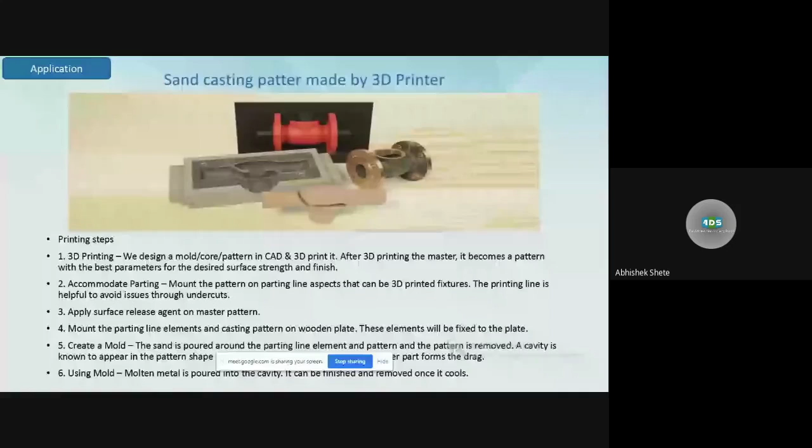Instead, if you have a CAD design of the pattern, cavity, or core boxes, you can directly 3D print those. You can create sand casting patterns with that, or you can directly use the 3D printed patterns or cores to create a sand cast.

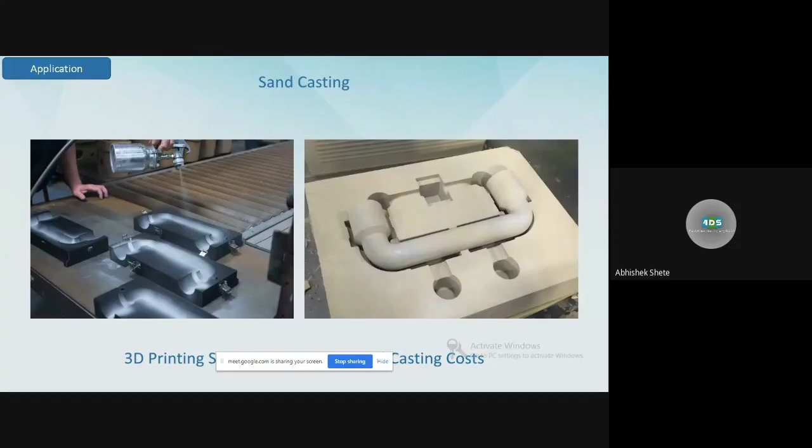This will save huge in terms of cost and timeline. With sand casting you only get one cycle — once your part is made, the sand will go down, and again you have to make that sand mold by pressing the sand with a rubber mallet in the core boxes, or the drag and cavities.

A 3D printed pattern can give you a much longer life, and you can save huge in terms of cost, and speed will be much higher. You can print it within a single day, and directly make the sand casting with the 3D printed parts.

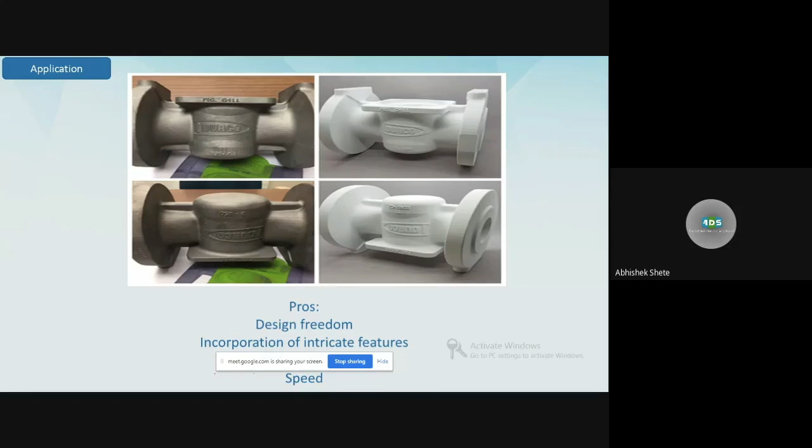There will also be design freedom, because if we are replicating the actual CAD on a wooden pattern, there are a lot of manufacturing challenges. But with 3D printing, you have the freedom to design a part or a pattern core as per the complexities. Then we have castable materials which can be directly used as a master pattern for investment casting.

For example, for jewelry or digital dentistry, you can directly print in castable resin materials and use those for investment casting as a master pattern, where it gets melted out by heat, and then you can pour the molten metal inside that cavity — if you know the investment casting process.

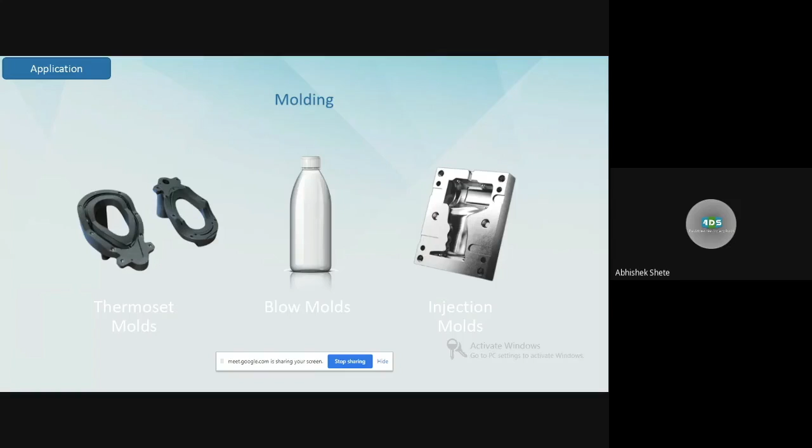So in terms of molding, you can use 3D printing as well. What exactly is the application with molding? If you see normal injection molding molds, the cooling channels play a very vital role in one particular cooling cycle, because once the liquid material is forced into the cavity of the mold, it needs to be cooled, and then ejected from the mold to prepare it for the next cycle of operation.

Typically one cycle takes around 80 to 90 seconds, depending on the complexity of the design. With traditionally manufactured molds, we can only have a cooling channel in a 90 degree pattern. But if we 3D print those molds, we can have the cooling channel along the profile of the mold.

So what advantage does that add? It will immediately cool the part when we force the liquid material inside the mold. When we pass the coolant through the cooling channel, it can immediately cool that material. So your earlier 90 seconds per cycle can come down to around 50 to 52 seconds.

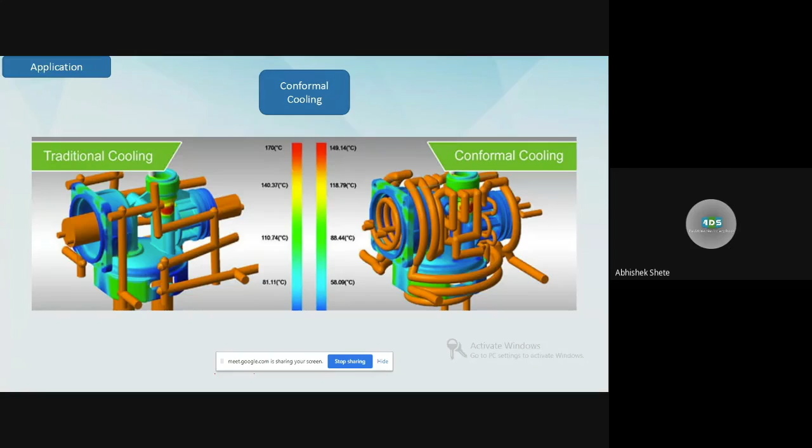Then second is heat dissipation, third is warpage, and fourth is flash point generation. All these issues can be overcome with conformal cooling channels inside the molds. So this is one of the advantages.

Then there's mold repairing — molds are generally very high cost. So after certain runs, say after 1 lakh or 10 lakh shots, there might be a little wear and tear on the outer profiles or the sharp edges of the mold.

So you cannot throw down those 20-30 lakhs value of those molds. With the DED based electron beam additive manufacturing or direct energy deposition manufacturing technology, we have a feasibility to only deposit material which has worn out.

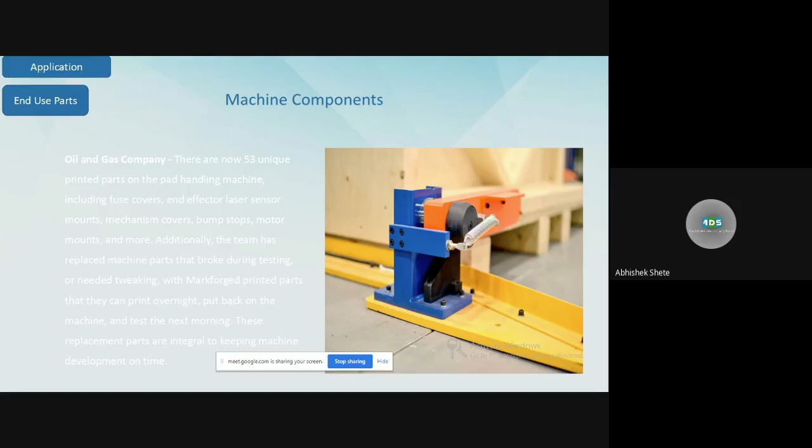Then end use parts. If you see, there are lots of machines where after a certain period of time, OEMs stop supplying spare parts. With 3D printing, you can use reverse engineering as well. You can directly scan those parts, extract point cloud data from that, generate CAD designs, and print parts which are legacy or proprietary parts.

Then 3D printing is very widely used in terms of digital inventory. Right now we need a huge amount of space in terms of inventory management and MIS. There are lots of parts on the production line which fail down after a certain amount of time.

For some parts, the life is around 1 month. For some parts, life is around 3 months. So what these guys do is procure that material in advance. There are lots of costs associated with advanced procurement of material, and the space required to store the material.

But if you have a 3D printer in house, you can save all the CAD designs, all the CAD diagrams, all the files in one server as a digital inventory, and whenever demand rises, you can print those parts on demand within a few hours or a very short span of time, and then supply it for replacement or as a spare part for your customers.

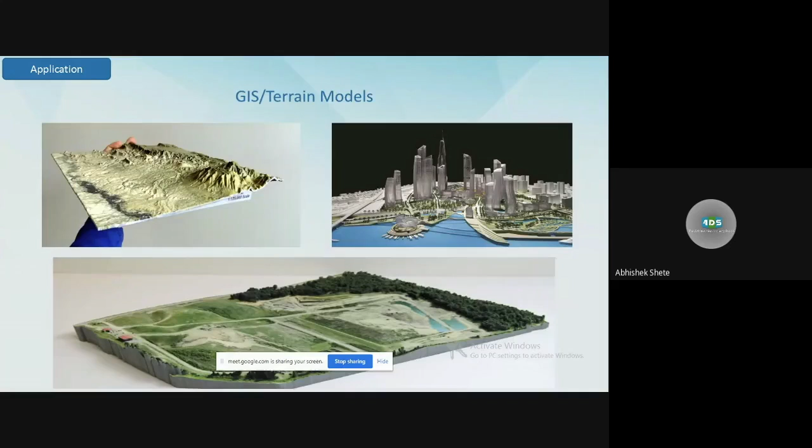Then for military and defense, you can plan high altitude wars. You need an actual replica of that particular area so you can plan your strategies for the war. So there are lots of applications of 3D printing coming in with construction.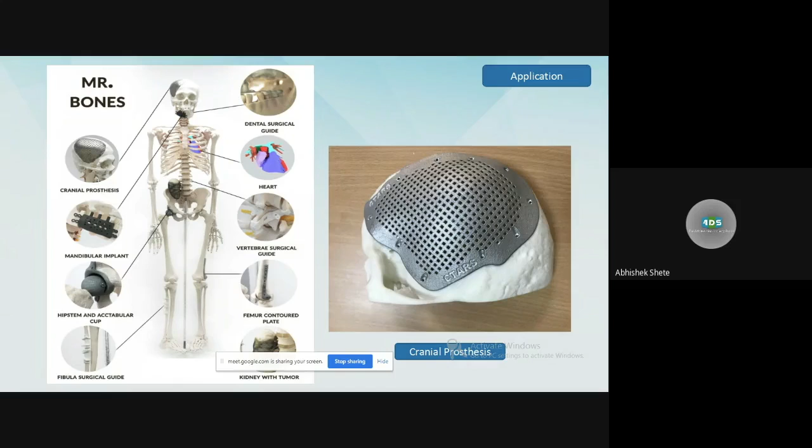These are metal 3D printed hip and knee joint caps. Generally on a flat plain surface, tissues never grow, so with the 3D printer we've made a porous structure on the machine component where tissues can bond together and replicate easily - it can grow.

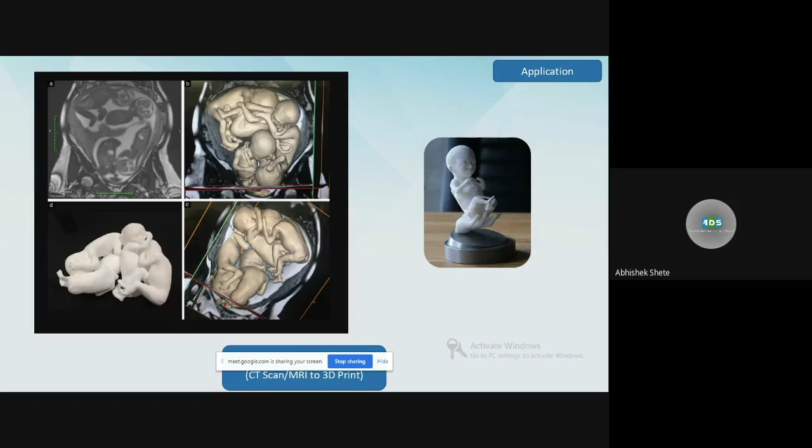So likewise, this is again one of the complex surgeries - we converted this MRI imaging into an actual 3D model and directly 3D printed it, where surgeons performed their strategies for the operation and carried it out successfully. So for pre-operative planning, 3D printing can be widely used.

Then these are some end-use products - if a person has cranial defects, you can print a cranial helmet. If he has disabilities in his hands, or you may have heard about the Jaipur foot, we use lower limb prosthetics or orthotics. All of these can be directly 3D printed and implanted on the human body.

This is one of the companies we work with, called DeeDee Labs. This man has lost his upper limb, his hand, in an accident. So what we did is 3D print this black colored hand, and this company connected this particular hand to his arm. They have an algorithm, artificial intelligence based on machine learning codes.

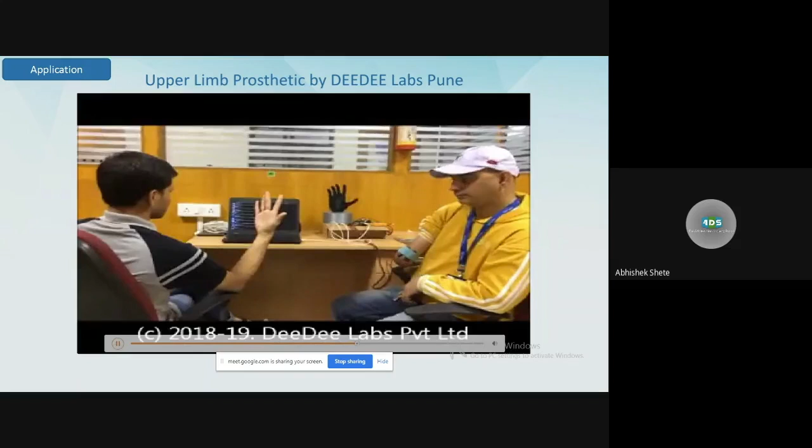So if you see, he is giving some instruction, and that particular man is giving those instructions to his hand, and that is actually getting reflected on this 3D printed hand.

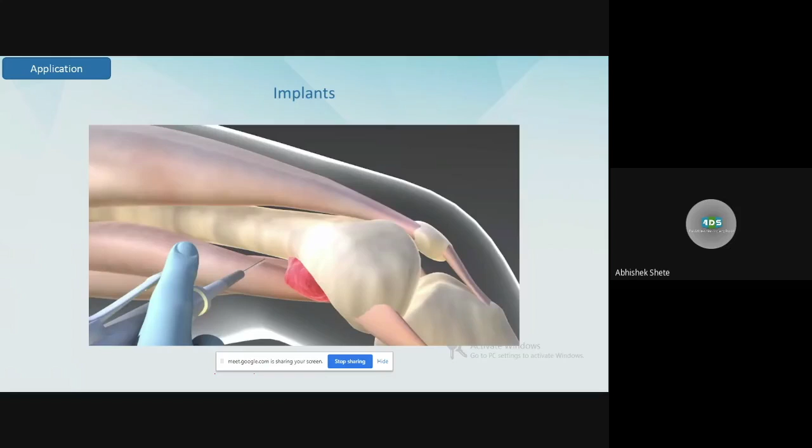So this is how we can connect 3D printed parts with AI and machine learning, to make it versatile and easily adopted by normal human beings. You might have seen the ad of Parineeti Chopra for clear dental aligners - those are also 3D printed. You can 3D print implants as well.

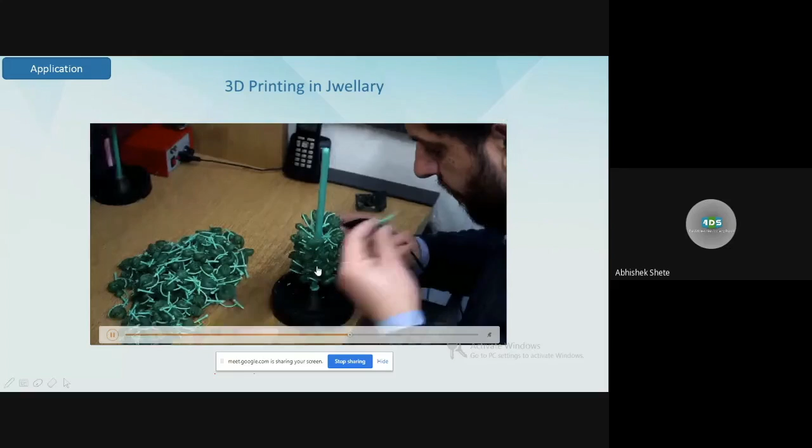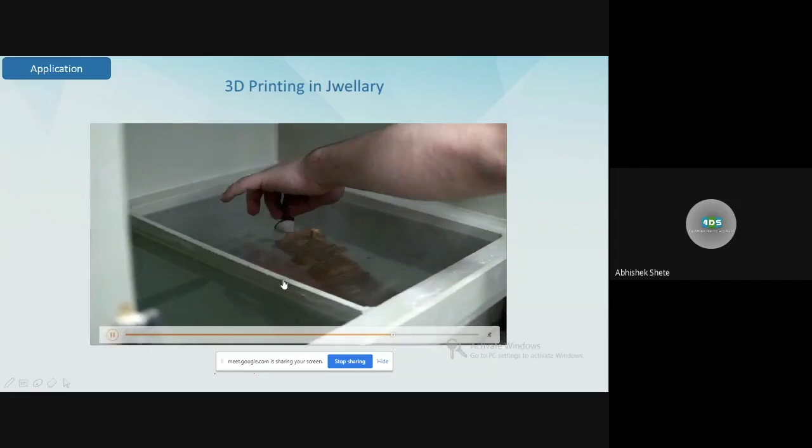In jewelry also, 3D printing is widely used - it's one of the biggest adopters of the 3D printer. Generally these parts are 3D printed, then they make a tree of the part. With this 3D printed part, they pour POP plaster or ceramic material inside, keep it in the furnace, and insert precious materials like gold to make ornaments. This way, high detail jewelry is manufactured with this technology. So jewelry industry is one of the biggest adopters.

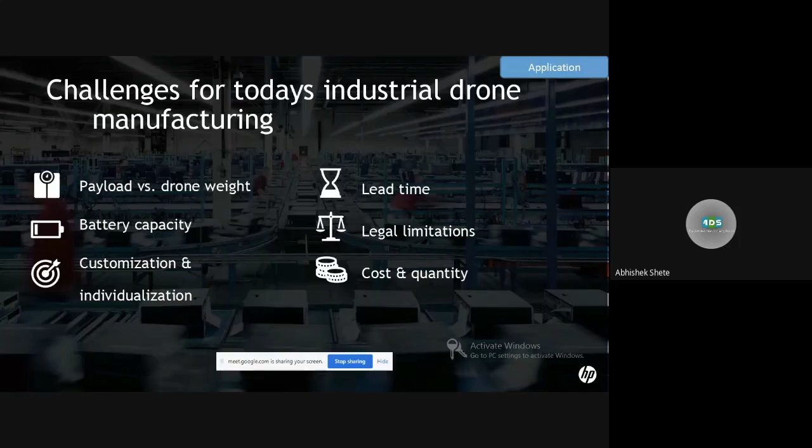Then drones - there are different types: some are multi-rotor drones, some are wing types. One important thing with drones is they should be lightweight, with maximum payload capacity and battery capacity. 3D printing can manufacture drone exoskeletons, structures, connectors, cargos, landing gears, payload bracket mounting, engine covers, camera covers, sensor covers - everything can be easily 3D printed.

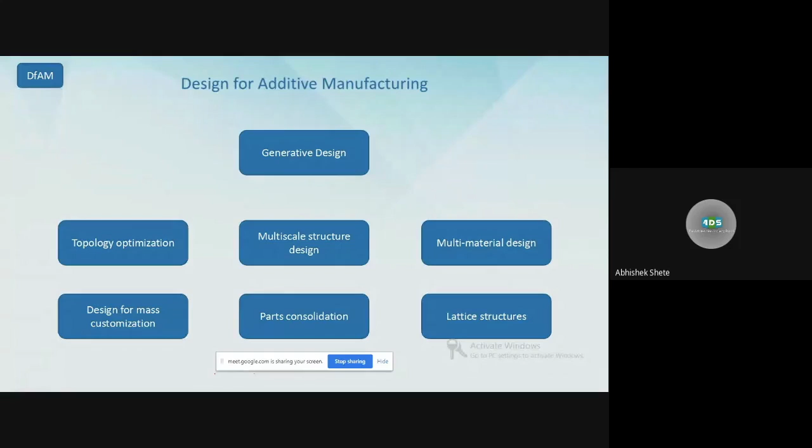So these were some potential 3D printing applications. Now, what exactly is design for additive manufacturing? Right now, generally when we 3D print anything, we design it in the way of traditional manufacturing - we don't implement design for additive manufacturing. For traditional manufacturing, we have design for manufacturing with its own sets of limitations for each process, and we have to design a part as per that process. So traditional manufacturing needs a part designed considering those limitations - our exact conceptual design idea cannot be replicated.

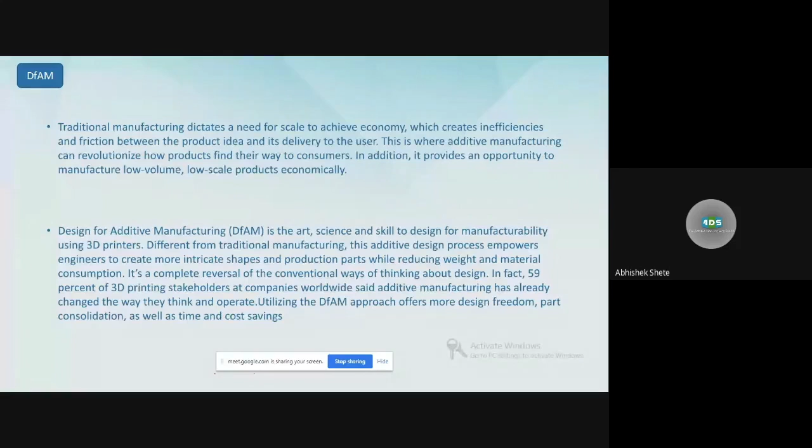With 3D printing and design for additive manufacturing, we can create parts as complex as needed. We can consolidate the part into a single component, converting those assembly parts into one.

Just give me a minute.

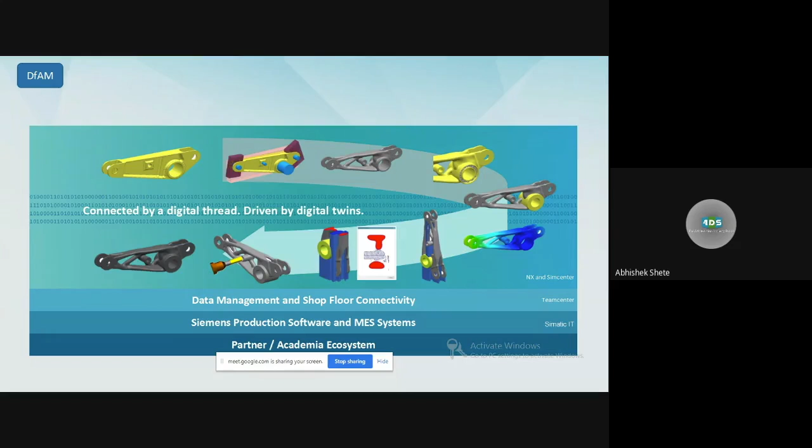Sorry - so if you see this design, this is a bracket used in the automotive line. Earlier it was manufactured with 7 different parts assembled together. With 3D printing simulation software, we converted it to a single consolidated design with free-form surfaces, which is much lighter weight. With these free-form surfaces, we can do simulations, apply node points, and validate it at the design stage itself, creating a part with far better performance efficiency, which is lightweight and a consolidated single unibody part. This is the advantage we can take with additive manufacturing.

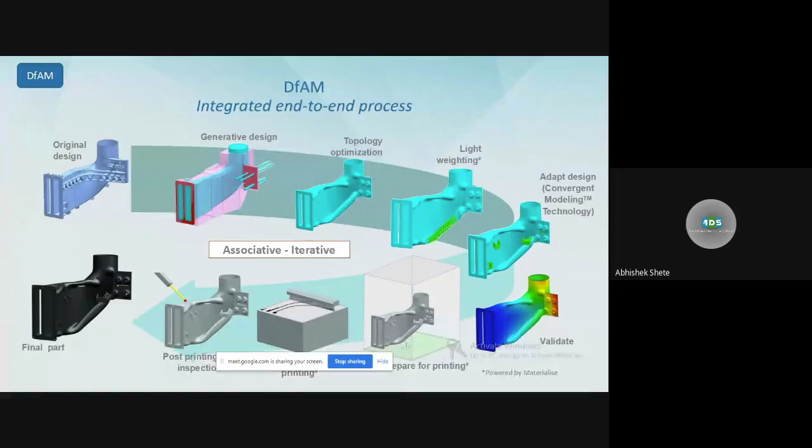If you see this seat belt bracket used in flights - earlier it was eight parts assembled together, converted into a single part with 40% lighter weight and 20% more strength. This is the process where Shashi sir was suggesting for the Siemens additive manufacturing solution, where we can create as complex a part as possible which will be very easy to 3D print.

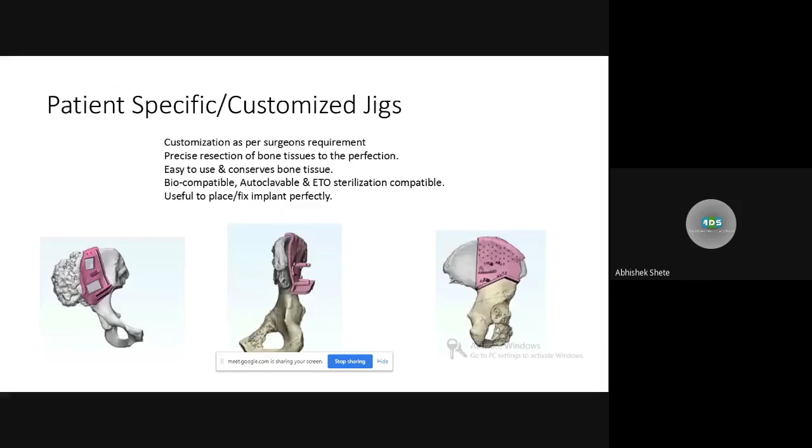So we are running out of time. I will just give you a detail about the bioprinting, what EnvisionTEC can do. There are lots of parts - if you need, I can send it to you.

I had less time, so I tried to cover a lot of applications. Thank you so much - if you have any doubts, you can ask now.